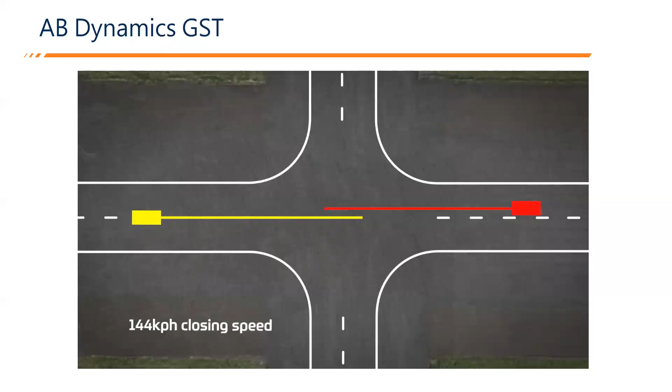I think probably most of you will already be familiar with the concept behind the GST. And that's because since its adoption by Euro NCAP for testing back in 2016, it's really become an essential test tool used widely across the industry to prove the safety of driver assistance systems and safety systems. And the concept's quite simple.

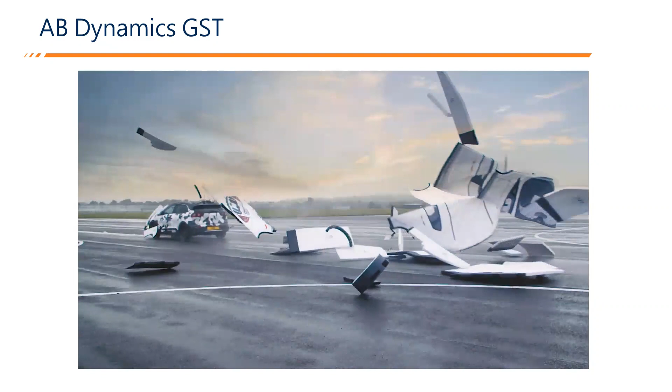The soft vehicle target is designed to look exactly like a real car. It's got the same radar signature as a real car. But if you collide with this platform, it can break apart into its component parts, which are made of foam. So there's really minimal risk of damage to your test vehicle.

So because of these kind of features, the soft vehicle target that sits on top has been used by Euro NCAP. And it also sets a standard now for the GVT and most recently the ISO 19206-3 standard. And some of the features of the product mean that you can quickly build it and rebuild it if you do collide with it in just 8 minutes. It's serviceable. When the parts wear out, the individual components can be easily replaced.

And really, this concept lends itself to these high-speed collisions by breaking apart into these component pieces. Really minimizes the risk of damage to your test vehicle like no other solution. So...

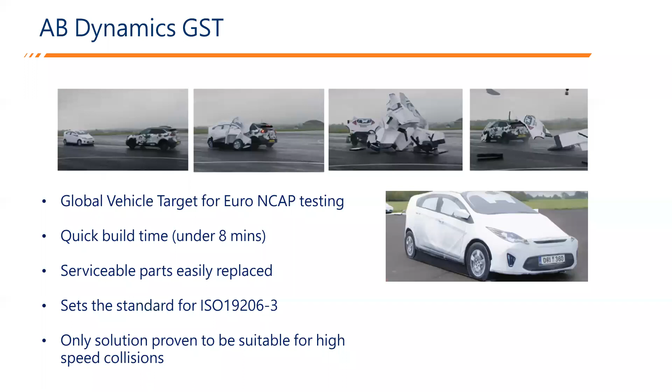Underneath the soft car body is an electric propulsion system. And that propulsion system is a low profile platform that sits just 100 mil from the road surface. And the platform can be overdriven not just by cars, but even by heavy trucks. But up until now, the platform has been limited to just 100 kilometers per hour.

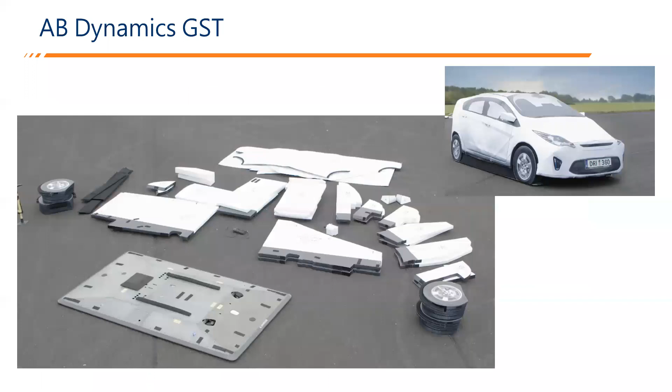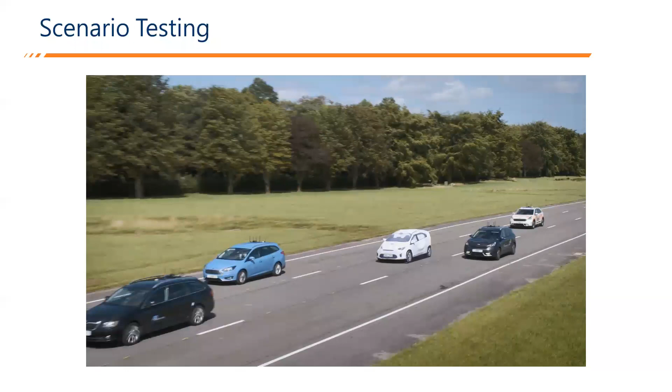And what we're seeing really is a trend from industry where autonomy is being introduced. But the testing requirements for autonomy and autonomous vehicles are much more challenging. So rather than simply being single vehicle hazards and single vehicle test cases, we're seeing that in the case of autonomous vehicles, there's a requirement for vehicles to be able to perform safely amongst traffic.

And what we're seeing is that in the first instances, we'll see autonomous vehicles introduced on our motorways, highways, and autobahns. And if we want to test those systems safely, we need test targets that can operate at highway speeds. So for the first time, GST120 makes testing at highway speeds reality.

So let's talk about what's actually underneath the soft car and built into this platform. And essentially the technology that makes up the GST120 is based on the industry-leading technology that we've already deployed in our existing product. But we've really taken the time to engage with our customers here and get feedback on how we can improve the platform and add new features which are needed for these new test requirements.

So just as some examples, we've increased the battery capacity to 4.8 kilowatt hours. So this is the largest battery of any of these platforms on the market. And what it means is you can have extended uninterrupted testing for the longest periods.

We've also worked really hard on the stability of this platform. And that's really necessary because we're traveling at higher speeds where the kind of wind disturbances and things become more critical. And we've been able to increase the wheelbase and also add additional dynamic controls into the control system to get good path following control.

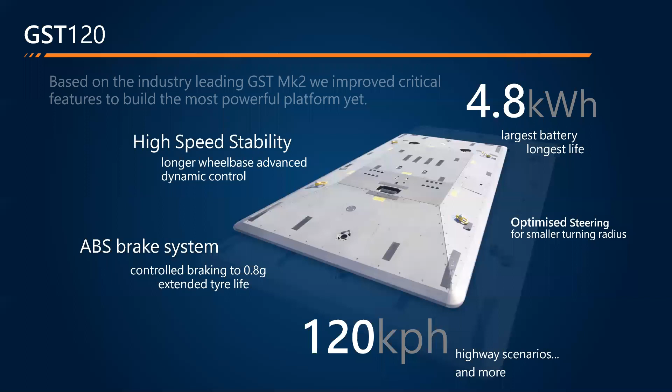So one of the key things that's allowed us to go at these high speeds is the new battery technology. And what we've been able to do is actually incorporate more batteries into our platform. So we're still relying on lithium-ion battery technology, but some of the features of our batteries are really based around the automotive industry standards for electric vehicles. So we've added new connector types and things that all come from the automotive industry.

And our concept involves building in the charging circuitry into the platform. What this means is that you can charge the platform up whenever you want. You can top it up, but also encompassed with this high capacity battery, it means we have the possibility of extended running. And this platform is actually capable of ranges of up to 40 kilometers. And that's really because of this large high capacity battery.

So with lithium batteries come safety concerns, and we've tested this battery to the highest standards. So we've been using the UN 38.3 testing approval process. And that means that this battery is tested and approved as safe for air freight. And part of the testing involves some really extreme, arduous conditions. So for example, these batteries have experienced really extreme temperatures, both high and low temperatures, as well as shock loading and vibration loading to prove that they will remain operational and safe.

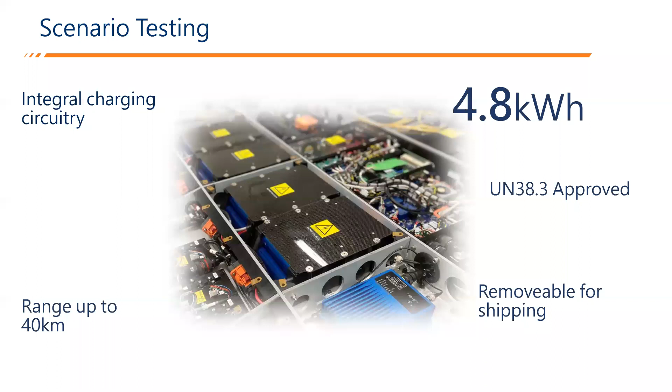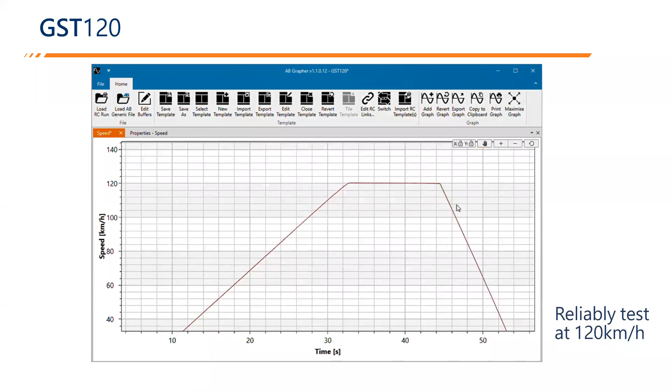So it's not just the batteries that allow for high-speed operation. We've also done a lot of work on the powertrain and the drivetrain in this system. So I want to welcome you to our dyno lab, and each and every GST platform that we build gets tested in this dyno lab.

And the dyno allows us to represent the real-life road loads highly repeatably and accurately, and not just the inertial loads based on the mass of the platform, but also the aerodynamic drag that the platform sees when it's traveling at 120 kilometers per hour. So I'm just going to give you a quick example.

So I hope you can hear the dyno in operation there, and it is noisy, and that's because the battery is actually drawing 40 kilowatts of power, and that all gets translated through to the rear wheel to propel this platform at 120 kilometers per hour.

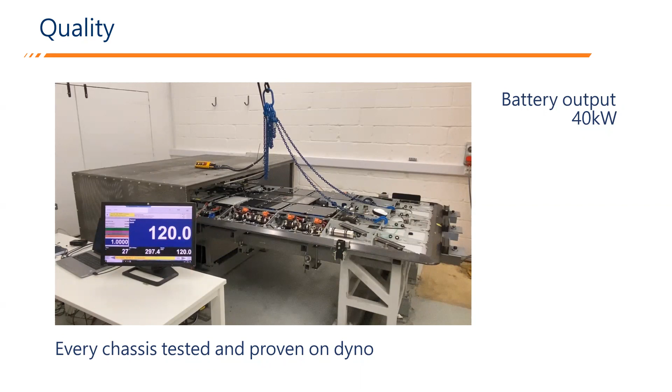So having this extra capacity for high speed and bigger battery brings some additional benefits. And we've also been able to increase the acceleration capability of our platform. So not only can it travel faster, but with this higher rate of acceleration, we can actually carry out our tests in less space. And that's really helpful and important, especially for customers where proving ground space is at a premium. So taking as an example, our existing GST product was capable of achieving around 70 kilometers per hour in 110 meters. But it took 150 meters to achieve 80 kilometers per hour. On the other hand, GST120 is capable of reaching that 80 kilometer per hour test speed in just 110 meters.

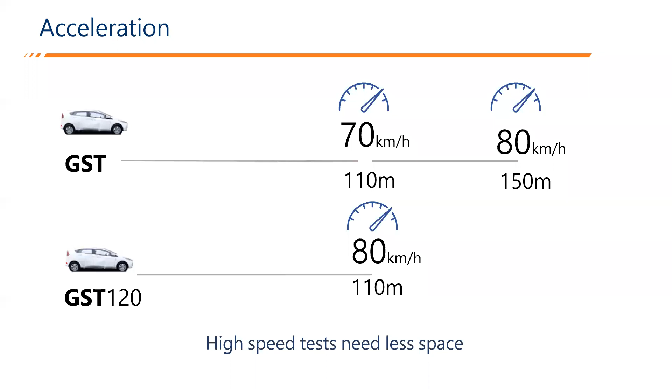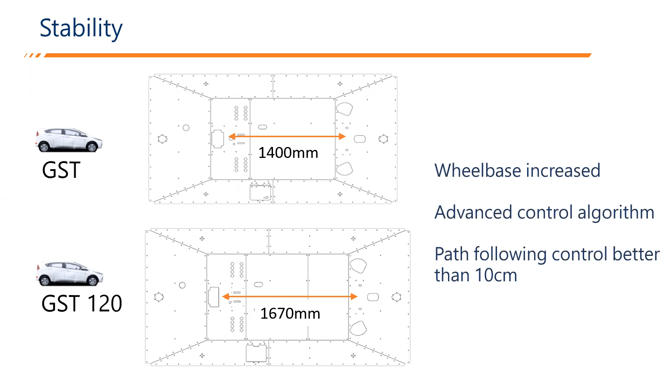So one of the other considerations that we wanted to make sure we addressed was the stability of the platform at high speed. And the GST120 has additional wheelbase, which means that we get inherently a more stable action at high speed. But we've also been able to improve the control algorithm. And not only do we feed back position and heading angle, but by also feeding back the vehicle states, we can accurately control the platform and ensure that the platform maintains its path following precision to within 10 centimeters.

So, of course, with all this extra speed capability, it's also really important that you can stop the platform safely. And I'd like to introduce you back to Alan again. So Alan Johnston's joined us. Alan, are you there? Yes, Andrew. So Alan's actually been working with and known ABD for the last 15 years. And that's because prior to joining ABD, Alan was one of our customers. And as David explained, Alan was working on the development of braking systems, which means he's ideally placed to help design and develop the braking system for our newest product, GST120. So Alan, please go ahead and share with us the details about this new system.

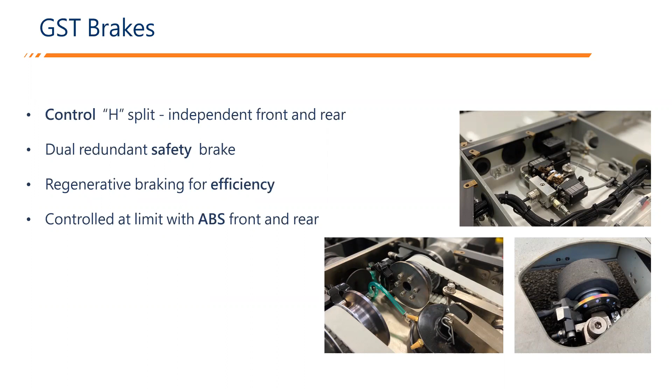Thank you, Andrew. Can I have the next page, please? So, hi, as David and Andrew have said, I have a long history of braking systems, and as any brake engineer will tell you, safety is number one. That is why the GST120 is fitted with a dual redundancy brake system, which can provide 6 meters per second squared worth of braking, whilst maintaining its directional stability. We have also utilised the regenerative capacity of the rear motor to extend the battery life and assist braking. And to minimise the tyre wear, we have added anti-lock brakes. All of this is designed to keep you testing safely and for longer. Next slide, please.

So to provide ABS functionality in the GST120, we added wheel speed sensors and some additional hardware. The control strategy of the ABS system is designed to hold the tyre slip around 20%. If the tyre slip goes above this level, the braking pressure is reduced until the tyre regains its grip. Technically, the system is a 2-channel 3-sensor ABS system. Next slide, please.

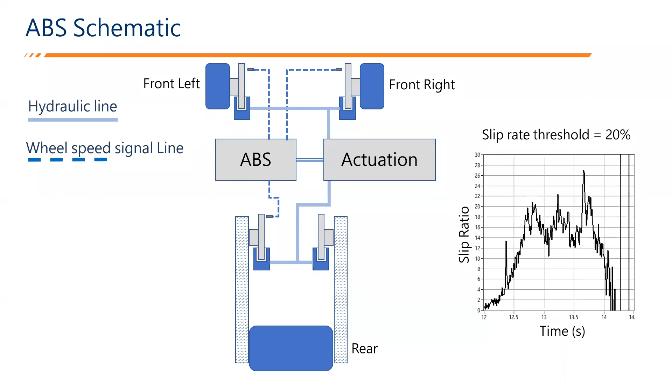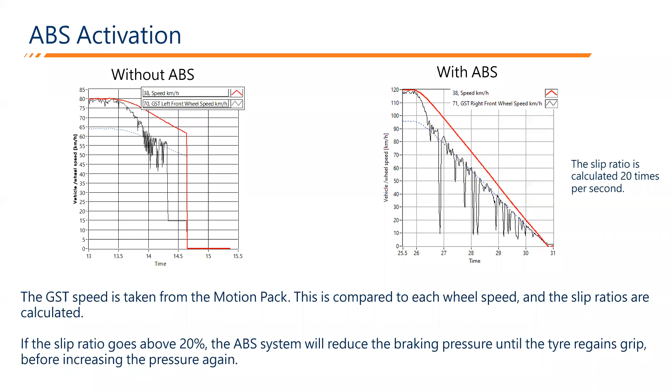So here are 2 examples. The one on the left without ABS, which shows the wheel lock for most of the stop, and this will, in general cases, flat spot the tyre. And on the right with ABS. In this case, you can clearly see the ABS system working hard to hold the tyre slip at 20%. The addition of the ABS to the GST120 has significantly improved the tyre life, and higher levels of braking can be achieved, in fact, to a class-leading 8 meters per second squared. Next slide, please.

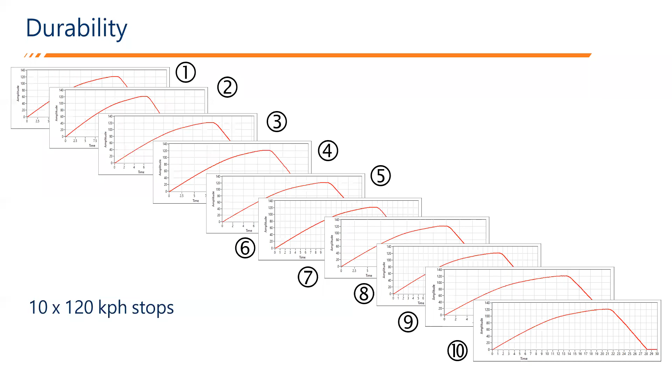And here are the next 10 stops. As you can see, we repeatedly achieved the target of 120 kph, and all the stops were conducted above 6 meters per second squared, with the ABS working to minimize the tyre damage. After these tests, the tyres were removed and inspected. Next slide, please.

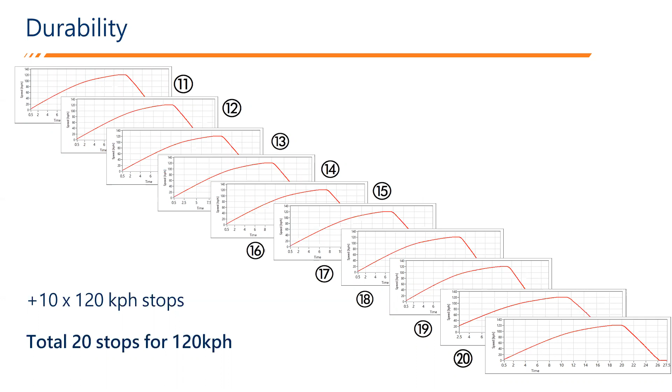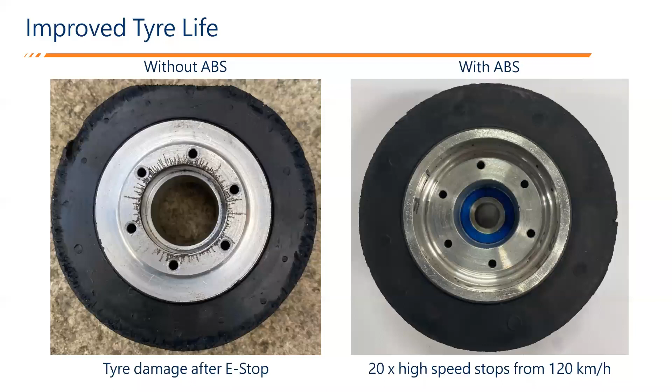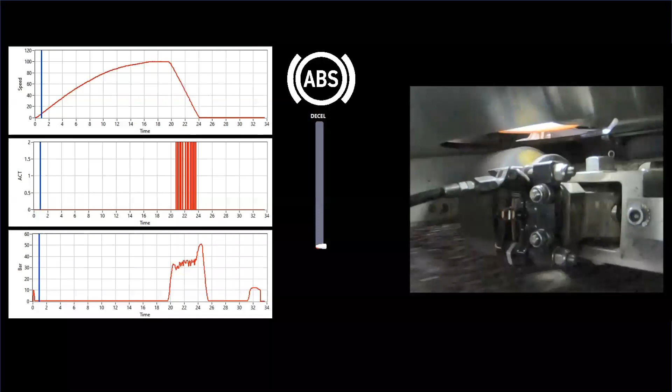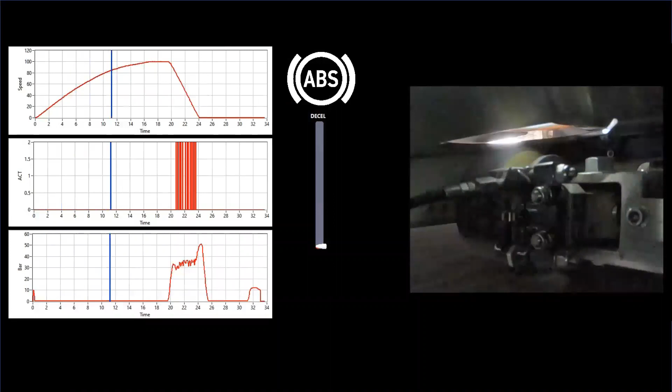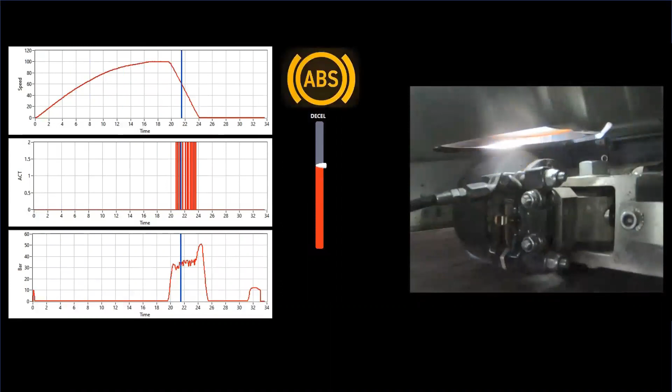So let's see the anti-lock braking system in action. So in this video, keep an eye on the yellow section in the tyre. This gives you an indication of the tyre rotation. The video shows the GST accelerating to 100 kph, holding its speed for 2.5 seconds, then performing a high G ABS controlled stop. You can see the GST speed top left, the ABS activation flag in the middle, and the line pressure at the bottom.

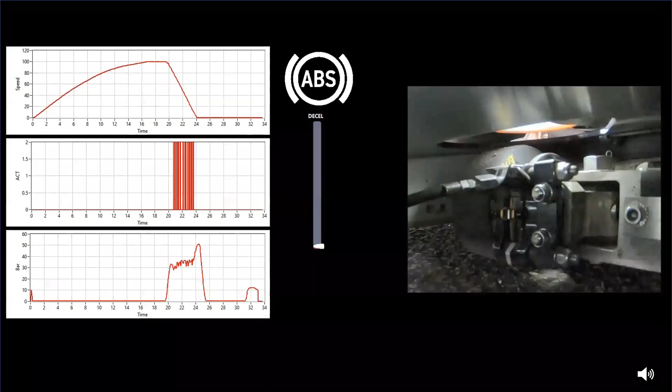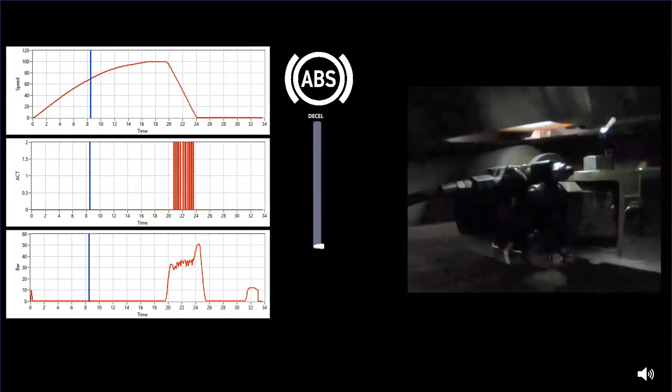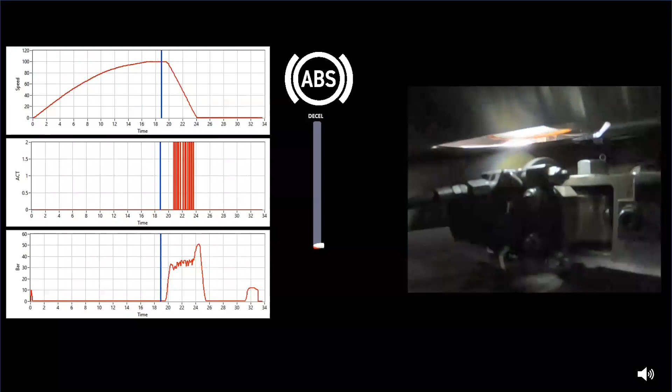So now that I've explained what to look for, let's play it again, but this time with some sound. Next slide, please. And that concludes my overview of the GST120. Now back to Andrew for the rest of the presentation.

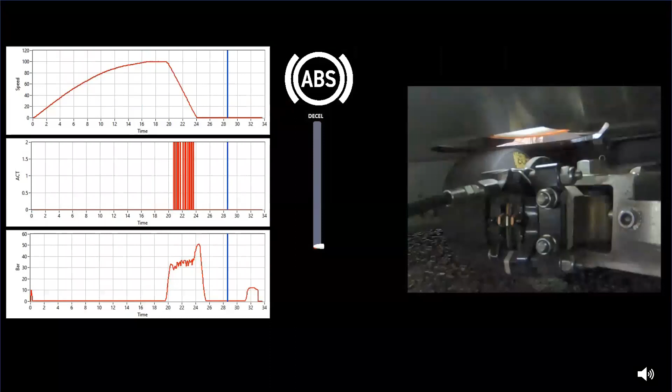Well, thanks very much, Alan. That was really helpful. Really great to see the braking system working so well on GST120. And what I'd like to do then is just take a look at some of the other typical scenarios that GST120 is really well suited to.

And I'm sure you're all probably aware, but there are some new regulations and requirements around UNECE ALKS, or automated lane keeping systems, as well as the Euro NCAP 2020 grading for assisted driving activity. And both of these test regulations have a requirement on looking at performance in cut-in scenarios where the vehicle under test needs to slow down in the event that another vehicle cuts in front of it.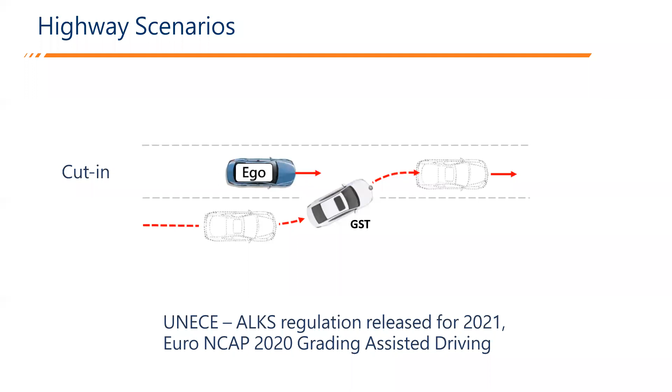So to help set up these types of scenarios, we have introduced a wizard into the software which allows you to quickly define a multitude of different types of scenarios using this graphical interface. And you can just see an example of one of these scenarios here. And in this case, not just a 2-vehicle scenario, but with some additional traffic as well.

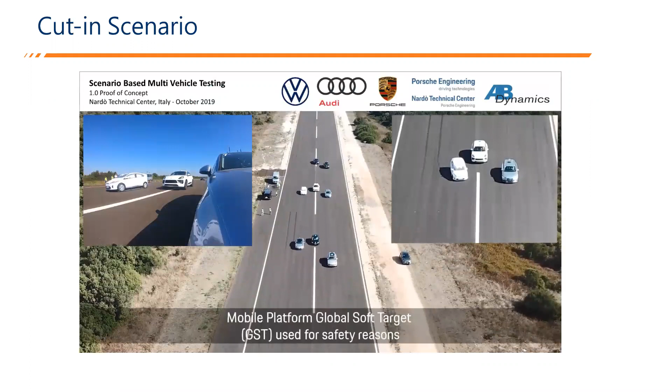And you can see that we can really closely and accurately control the GST to cut in front of the vehicle under test, in this case to within just 1 meter. And of course, when you review this video, you can see that the vehicle under test safely slows down to maintain that safe headway between the vehicle ahead and itself.

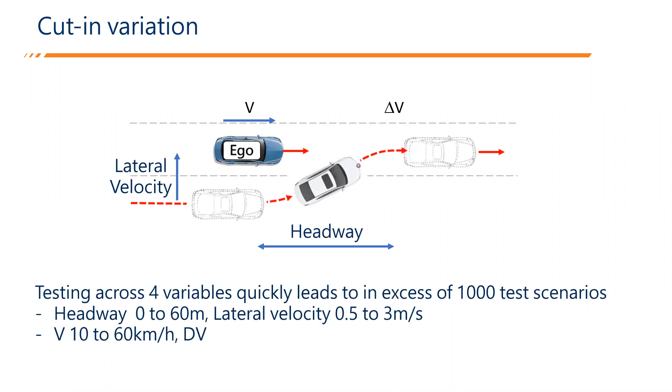Now, if we take the UNECE regulation, it's really interesting actually, because it defines around 4 different variables that all need to be considered when looking at the cut-in scenario. And of course, automated vehicles need to be able to perform safely in every single circumstance. So what that means is really every single combination and permutation of test scenario needs to be proven to end in a safe result. And with these 4 variables, headway, speed of the vehicles, closing speed, and lateral velocity of the lane change, you very quickly end up with over 1,000 different test scenarios.

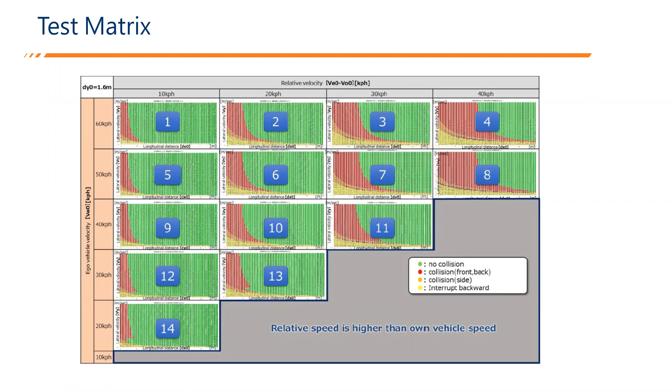And that's illustrated really well with this matrix here. And you can see that on the 2 axes, you've got speed and closing speed. And then each box there represents a combination of those speeds. And actually, every pixel inside those boxes is one unique test case. So it becomes quite challenging to run all of these tests on the test track. And this is where simulation comes in.

And we've developed a virtual GST in collaboration with our sister company, rFpro. And rFpro are capable of simulating real-world test tracks in a really high fidelity digital twin virtual environment. And by using these virtual environments, we can run the many thousands of iterations of tests, and then we can pick out those key edge cases to run for real on the proving ground.

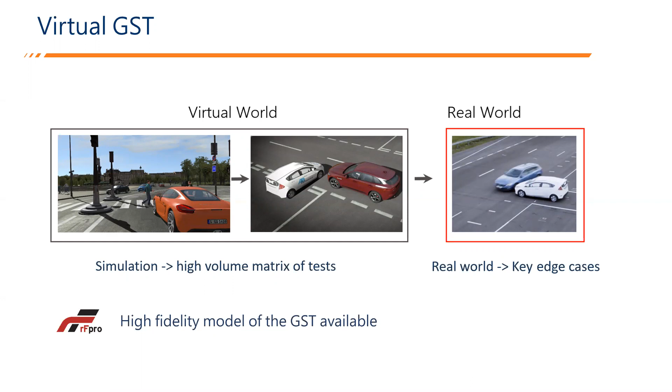And we can also run the same tests on the proving ground to validate the simulations that we might run in the virtual world. So in this way, we can really take the virtual simulations and transform them into real world testing scenarios.

And I want to leave you with just one further scenario. If you can picture yourself traveling on a highway or a motorway, but the lane ahead of you is closed. So as a driver, you'd naturally merge and turn in cooperation with the other vehicles in the adjacent lanes. And autonomous vehicles will need to do the same thing, even when the lane is blocked by another vehicle. In this case, that other vehicle is the GST.

So we can actually program the GST to be intelligent and to react and respond to the traffic around it. And we can do that because we can incorporate Python scripting via an optional module into the control system on the GST. And what this means is that the GST can react, slow down to block the vehicle in the adjacent lane, or even allow the vehicle in the adjacent lane to enter, but only after a set delay.

But it means that we can completely control the test scenario and really challenge the autonomous vehicle and check the safety of that vehicle. And what's more, we can take these same scenarios and we can run exactly the same thing in the virtual environment. And here you can see the same thing running in the rFpro digital twin environment.

So really that concludes the presentation on the GST120. I hope you can see how the GST120 brings new possibilities for testing of not only driver assistance systems, but also autonomy, and especially for these highway scenarios that need to be conducted at high speeds. We'd just like now to invite the rest of the panel back again, because we'd be really pleased to answer any questions that you've had through the presentation.

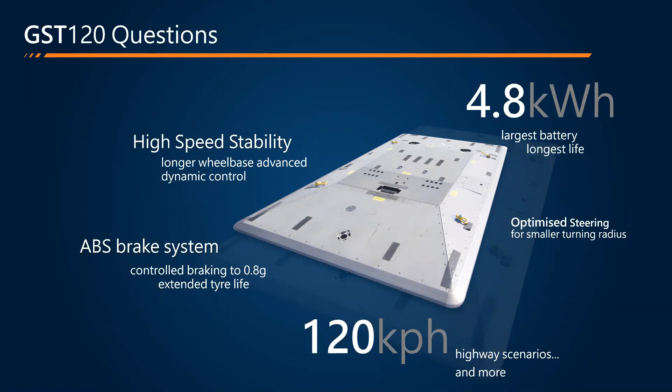Let's start with a few questions around batteries then. This is probably one for either you, Andy, or you, Ed. What are the voltage of the batteries? And the reasoning behind that question is, are they still subject to ADR or Class 9 legislation? So yeah, I can probably answer that straight away. So each battery pack has a voltage of 50 volts, and together they combine in the GST platform to give around about 300 volts. And yes, you do need to take consideration of the ADR Class 9 legislation when you ship these batteries. But we have tested the batteries against the UN 38.3 regulations, which means you can ship these batteries safely.

Okay, thanks, Andy. Staying with batteries, we've had a question about charging. How long does it take to charge? I can take that one, David. So in terms of charging, it really depends on each customer and their use of the platform. But the charging times are very similar to those of the Mark II GST. Basically, a fast charge can be completed in 1 hour, but periodically there is a benefit in extended charging, which can take between 2 to 3 hours, and it helps balance the cells so that you're always at the best performance from the platform.

Okay, thanks, Ed. And do we have any information about how long the batteries last in terms of when would they need to be replaced within the product's life cycle? I mean, there are GSTs out there from day one that are still running their original battery packs, and we're talking over 5 years. So once again, it really does depend on individual customer use, but it's very rare that we have to replace the full battery system of a GST. Okay, thank you very much, Ed.